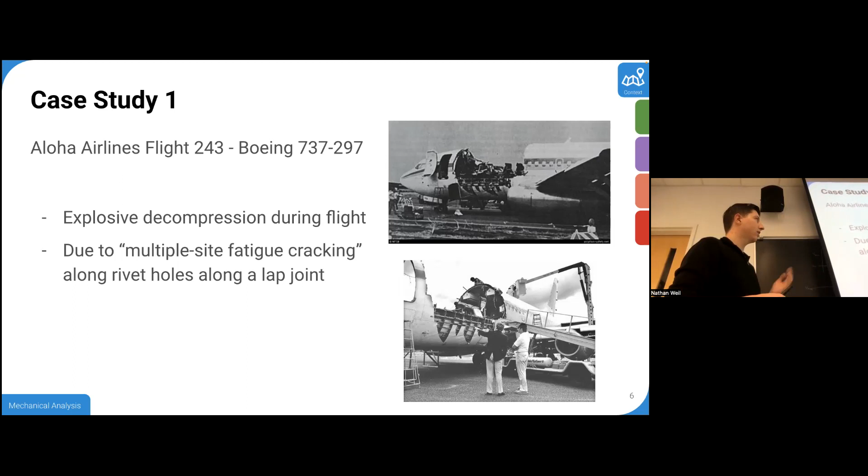A lap joint between two plates of metal—basically an airplane, right? It's a pressurized system, a pressurized tube. So every time it's pressurized and depressurized, it pulls tension and then releases that tension, repeatedly. That repeated loading caused fatigue cracking to occur along those lap joints in the metal. So what happened was that panel got overpressurized, and eventually, even though it should never have broken at that limit—it's way below its yield strength when it was first manufactured—because this crack started forming, explosive decompression occurred. Very scary.

So what happened was the gusset plates were a little bit undersized, which means they were prone to fatigue much faster than they should have been, and the plates cracked, and then the beams weren't connected anymore, and thus the bridge collapsed. So yeah, fatigue is real, and it's scary, and it is kind of hard to predict, and it matters a ton for really big stuff.

That's the gist. But it also matters on small things. I'm pretty sure if you're here, you've probably done the paperclip bendy thing at some point. If somebody handed you a paperclip, how would you break it? You're not going to sit there like an instructor and just pop the thing—that'd be pretty entertaining, but I don't think I can do that.

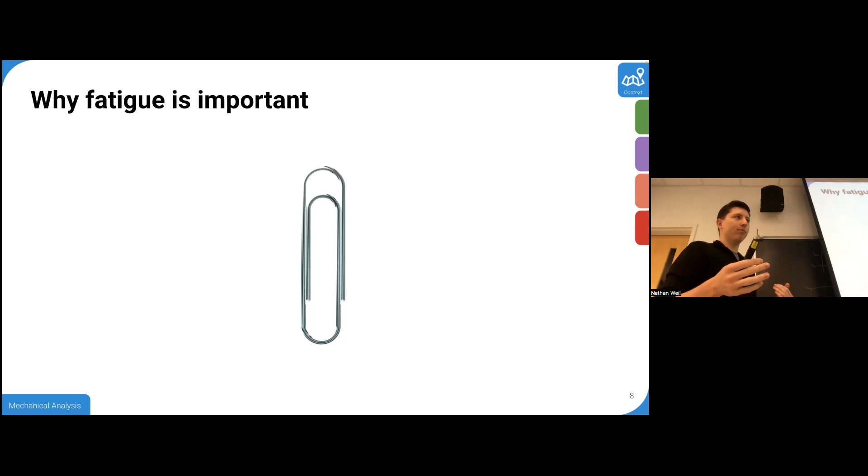An important thing about paperclips to note is that when you're bending them back and forth really quickly at a severe angle, you're not just passing the yield—you're going past the yield strength, right? Because if you bend it all the way over and let go, it'll stay in that position. So that means you're passing the yield strength in bending.

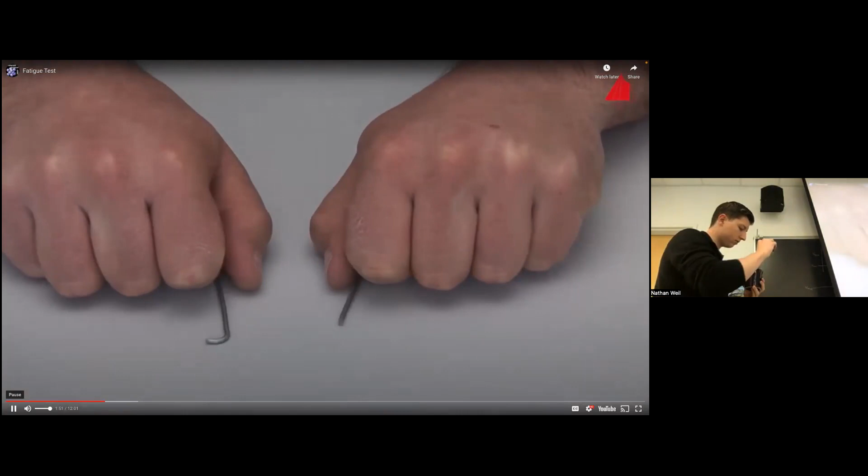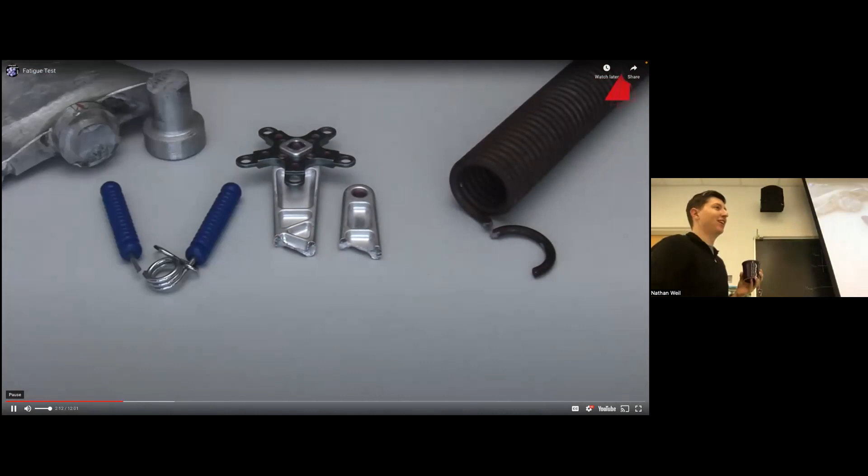This bicycle crank arm had only been able to endure the cyclic loading for a certain time before it broke. The fate of the garage door spring was the same - it had fractured. The broken exercise equipment, a torn compressor blade of a fan, a bandsaw blade full of cracks, the broken screw, a defective universal joint, and many other examples show how important this phenomenon is.

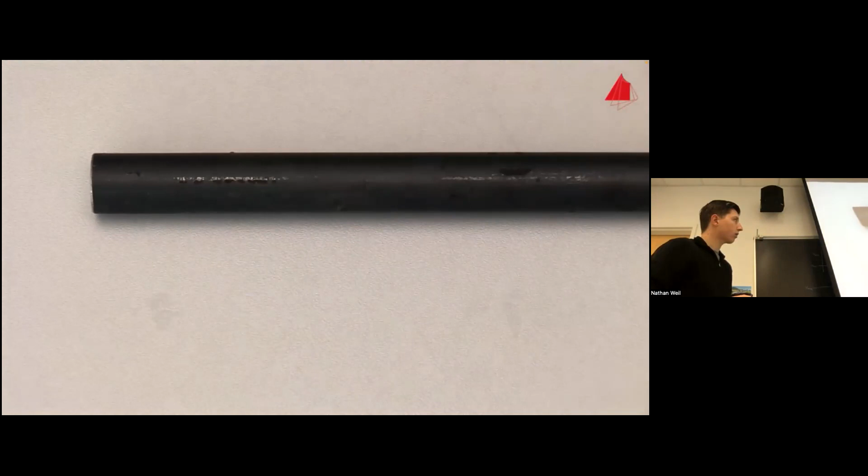Each day, thousands of items break due to cyclic, often repeated loading. How can we make sure that all these components withstand the cyclic loads? To achieve this, one has to test the materials appropriately. We intend to measure the fatigue strength of a frequently used steel in our laboratory. Hot-rolled steel rods made from the structural steel S235JR are used as base material. In order to eliminate the influence of the surface and to stress the material in a well-defined manner, suitable specimens have to be machined from the rods.

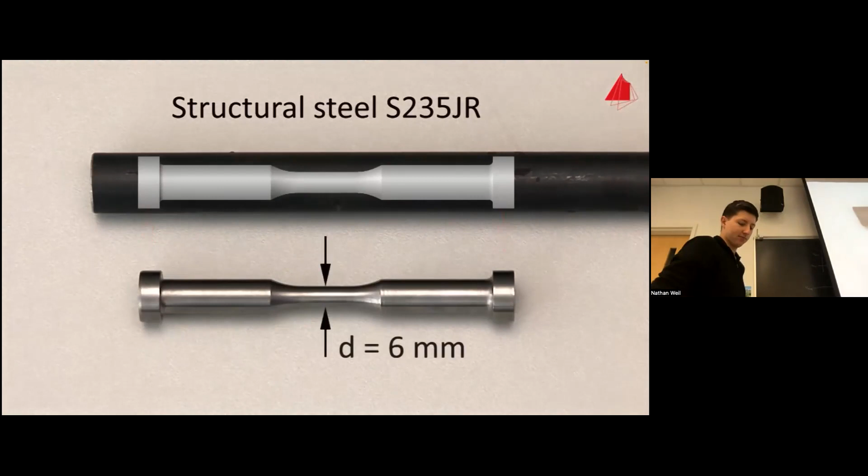This specimen type would be ideal. The shoulder-shaped ends have been designed for safe gripping. The actually tested region is cylindrical with a diameter of 6 millimeters - it's a revolved dog bone. The material tester goes to the workshop to get 10 specimens manufactured from the rods, not just one. All of the specimens are as identical as possible. Back in the lab, he has all specimens ready for use and picks out the first one.

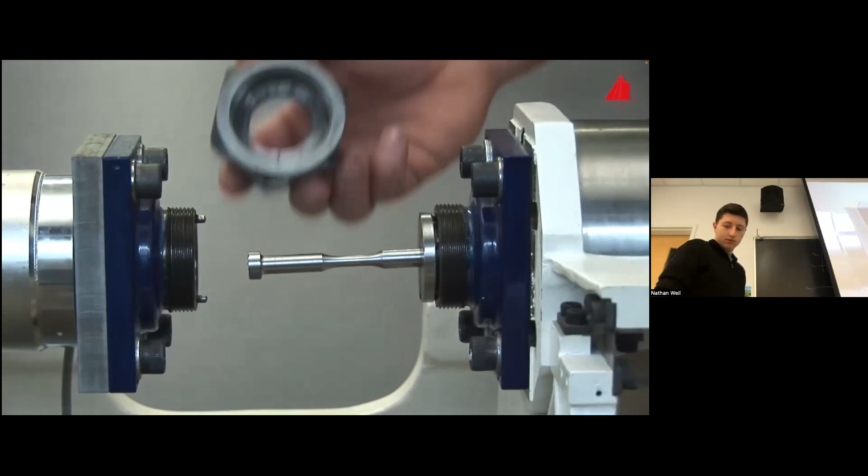He mounts the specimen carefully and securely into the fatigue testing machine. Together with two half shells, he inserts one end of the specimen into the right specimen grip. With a union nut, he locks the right end. Likewise, he mounts the left end into the left specimen grip and tightens the nuts.

The preparation is now complete. The material tester then selects the appropriate test parameters on the control computer. He intends to load the first specimen alternately with a tensile force of 7 kilonewtons and a compressive force of 7 kilonewtons. The mean force is 0.

A click on the start button and the testing machine begins to stress the specimen periodically.

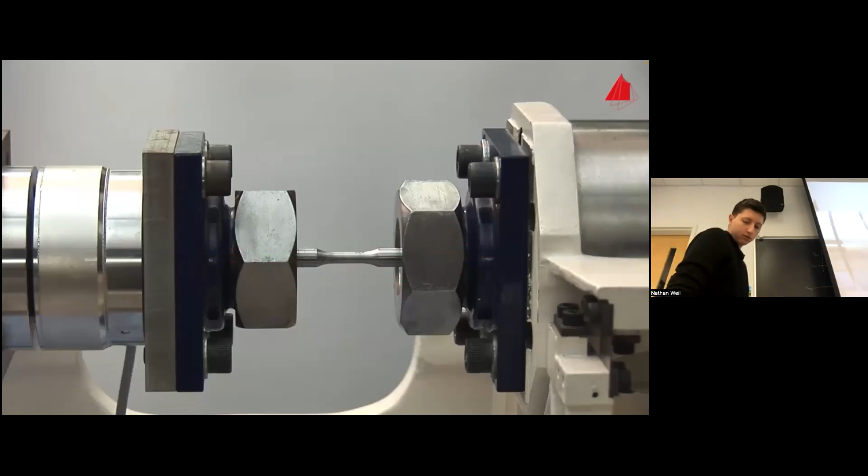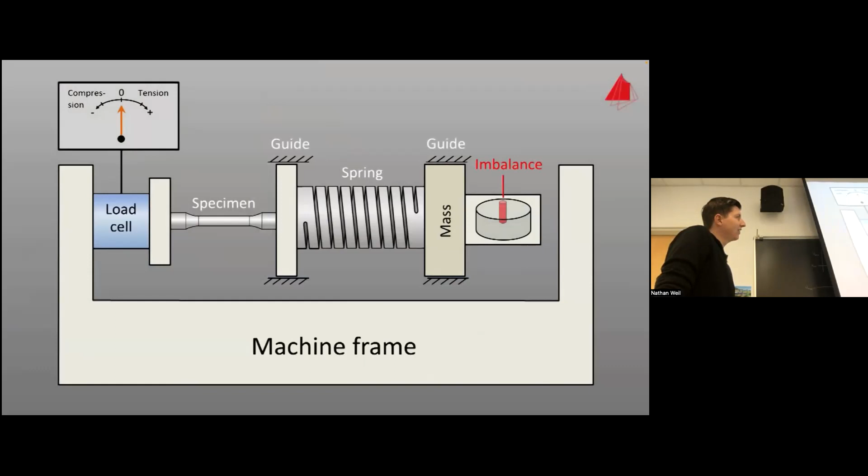Our fatigue testing machine is equipped with a mechanical resonance drive. The specimen is connected at its left grip via a load cell to the machine frame. At the right grip, a spring is mounted, and there in turn, a mass. An imbalance stimulates the mass to vibrate. Longitudinal guides prevent the mass from vibrating in the transverse direction. Via the spring, the test force acts on the specimen. By varying the excitation frequency of the imbalance, the test force can be controlled. In our case, the specimen is loaded with about 25 cycles per second.

Meanwhile, the first specimen has already endured over 300,000 load cycles and still seems to be intact.

That's fast, but it'll take a little while.

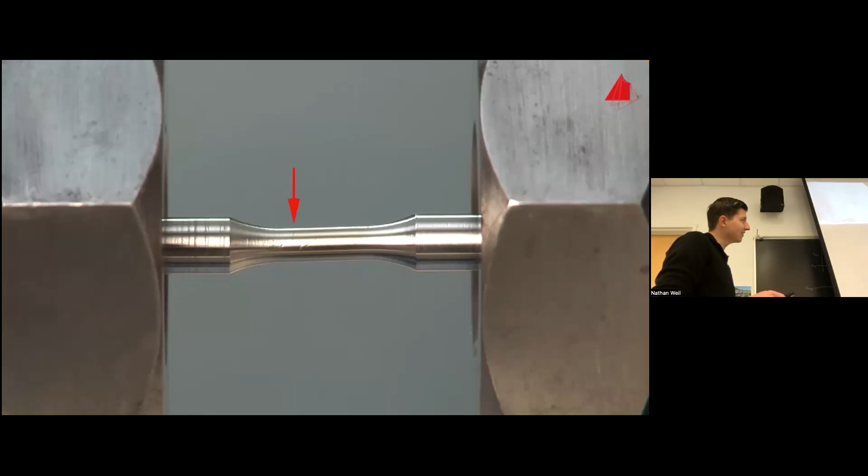In reality, however, several cracks have already developed on the surface, the so-called fatigue cracks. With each load cycle, they grow a bit further. The biggest crack gains the upper hand, grows the fastest, and finally leads to fracture after 381,000 load cycles.

The first test is finished. The material tester removes the fragments cautiously and inspects the fracture surfaces.

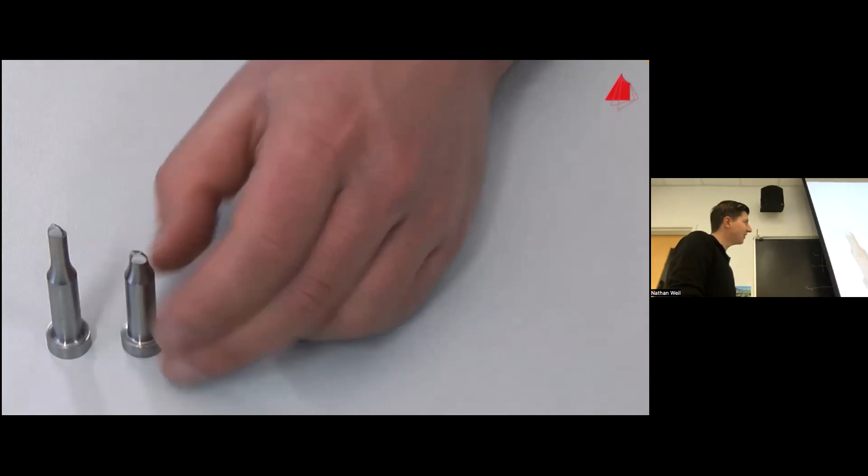At first glance, the fracture surface looks unimpressive. A closer look reveals two regions: the rather dull, predominantly flat fatigue crack propagation area, and the rough residual fracture area. The residual fracture area results from the final catastrophic rupture. The fatigue crack propagation area has developed during the cyclic growth of the fatigue cracks starting at the surface of the specimen.

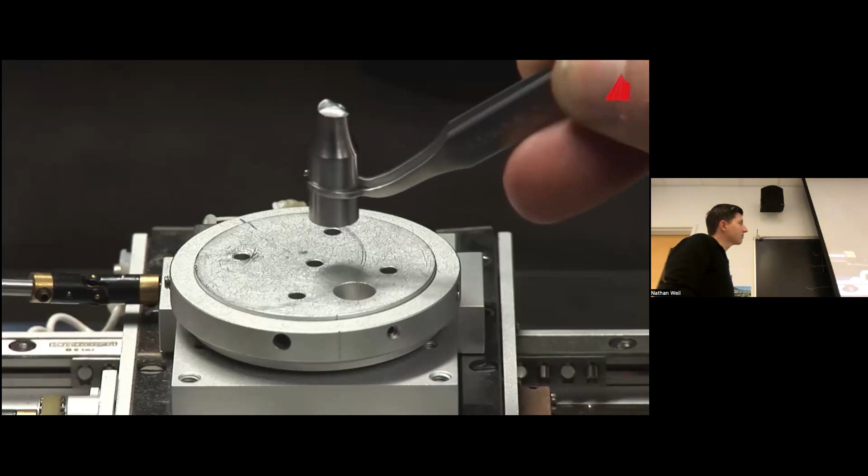What does the fatigue crack propagation area look like at higher magnification? One of the fragments is carefully placed on the specimen stage of our scanning electron microscope. Now we can investigate the fatigue crack propagation area in detail. In some places, but not everywhere, parallel grooves and ridges can be seen, the so-called fatigue striations. Each groove and each ridge has been formed by an individual load cycle, a typical phenomenon.

We want to know how many load cycles this material can endure with other loads. For this purpose, the material tester picks the next specimen from his supply and installs it into the fatigue testing machine.

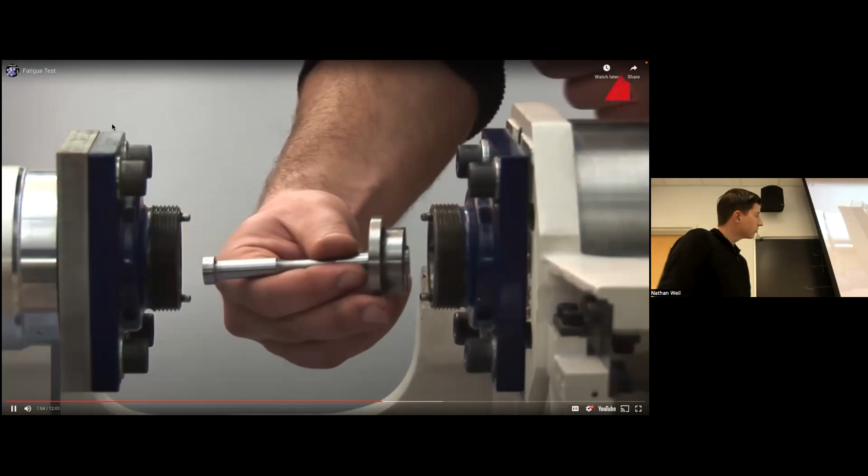The problem with materials is that... there we go. They should really fix that. I don't know why it does that every single time. All right.

Yeah, does that make sense to everybody? Kind of super cool. I love that, like magnetic, or the mechanical resonance drive. It sounds like super sci-fi, but it's pretty cool. It's a big spring. Anyway, also the kilonewtons, like lots of kilonewtons. That's like significant loading. That's kind of crazy.

Yeah, so fatigue life, there's a bunch of words that all are a little bit different depending on where you look, and they all mean the same thing though. So fatigue life, or this N number, N usually refers to number of cycles, and sometimes it's N sub F, some other things like that. It's just the number of cycles, and then S sub F is the fatigue strength, and that's in some stress unit, not strain, stress unit.

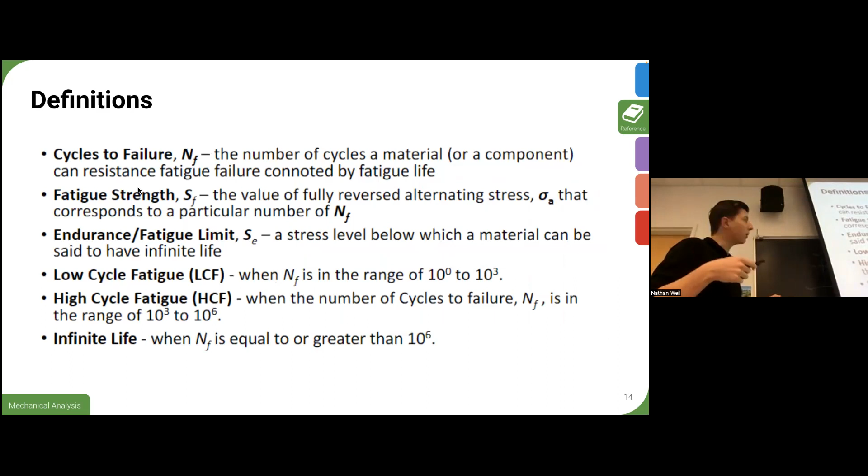Endurance fatigue limit - this is a stress level below which a material can be said to have infinite life. This is answering your question. We're going to answer it more specifically later. There's also low cycle fatigue, high cycle fatigue, and infinite life.

So I don't buy that. I don't think this is always true. I think it's often true for particular materials, but I don't think it's always true. It's also not true in every situation either.

Like helicopter parts, for example, they endure cyclic loading, hundreds or thousands of RPM. Engines too, hundreds of thousands of RPM for hundreds and thousands of hours. So that is a lot of cycles, and you could get past this number relatively quickly.

Basically, different industries and different load cases, different parts have different numbers of cycles they need to endure based on the loads they see. So infinite life can mean different things depending on different parts. But if it's more than this, it's probably not going to fail in the foreseeable future. But that's not good enough for helicopters or airplanes, of course. I'll talk about low and high cycle fatigue in a second here.

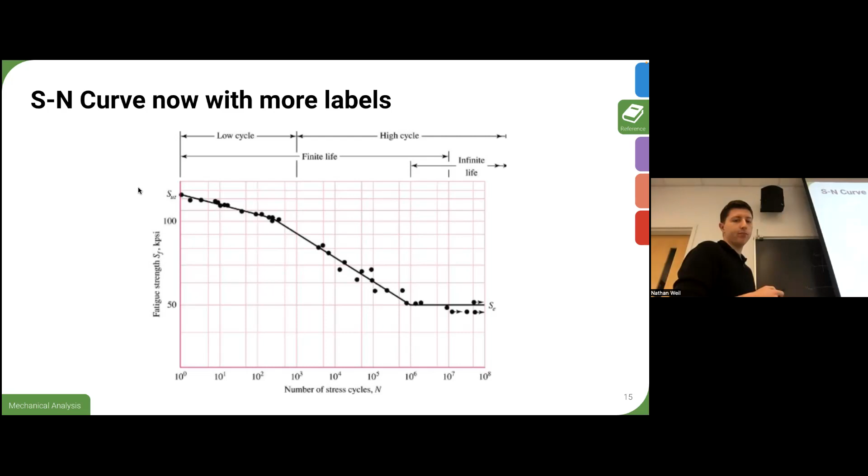Cool, okay, so here are the 3 big methods that are most used probably. Stress life is the big one - this is based on the stress levels only, and it's not accurate for low cycle fatigue when there's a lot of plastic deformation, but it is the most traditional method. It's the go-to, definitely the easiest to implement, and it can do it really quickly.

There's a lot of supporting data for it, for different materials and all that kind of stuff. And it represents high cycle stuff pretty well—anything that's more than a couple thousand cycles. So that's like this stuff over here: small oscillations causing cracks over long periods of time or long numbers of cycles.

There's also strain life, which is kind of a more detailed look at plastic deformation in localized areas. So that's kind of like this—for example, for the paperclip, you're causing plastic deformation at that point. That's good for lower stuff. There's also some uncertainties here because it really depends on the exact piece that you're testing. So again, it's a statistical approach with a large safety factor.

And then linear elastic fracture mechanics—this is advanced computer simulation stuff that you combine with testing. For example, this might be used on bridges where a couple of cracks have appeared. A lot of time engineers can use this to define a critical crack length, where as long as the crack is shorter than like 1/10 of an inch, it's fine. And if it goes beyond 1/10 of an inch, it has to be repaired or the part has to be replaced based off of these predictions.

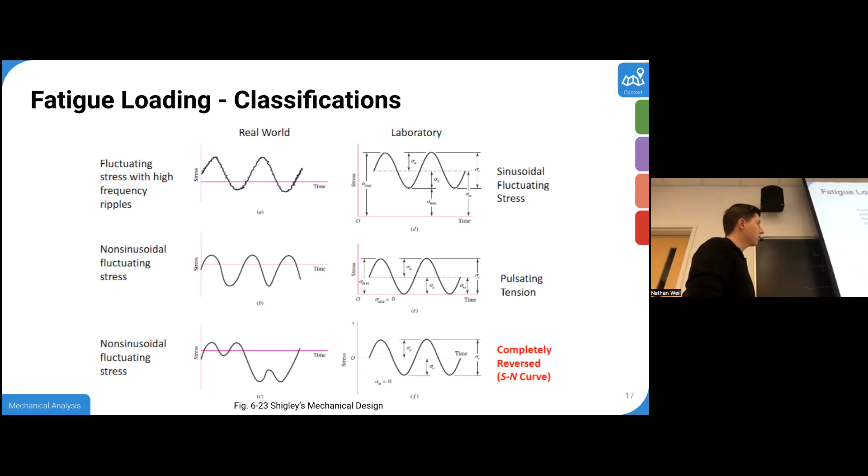So just be aware that stuff is tested like this, and then the real world treats it like this. That's another reason you have to add even more buffer, because there's no guarantee this could be better or worse depending on what the actual amplitude is and what all the patterns are. So, definitely less predictable—more issues, lovely.

Okay, so here's some cool symptoms of metal fatigue, looking at the different parts. Stage 1 is initiation of the micro crack due to cyclic plastic deformation. That can also be really tiny local yielding—it doesn't have to be macro yielding of the part, or dramatic change in strain. It can happen at a local level, but for plastic deformation this is true.

And then it progresses to a macro crack, and it opens and closes, and that's what causes those striations. Every time the part's loaded, it opens up, tears a little bit more, then it's compressed again and tears a little bit more, and that oscillation is what causes these stripes. So you can see the crack initially started there, and then it kind of got pulled and pulled and pulled.

And then this area down here is where the remaining material is insufficient to carry the load, and it fails by simple ultimate failure—so it pops. This is also in Shigley's.

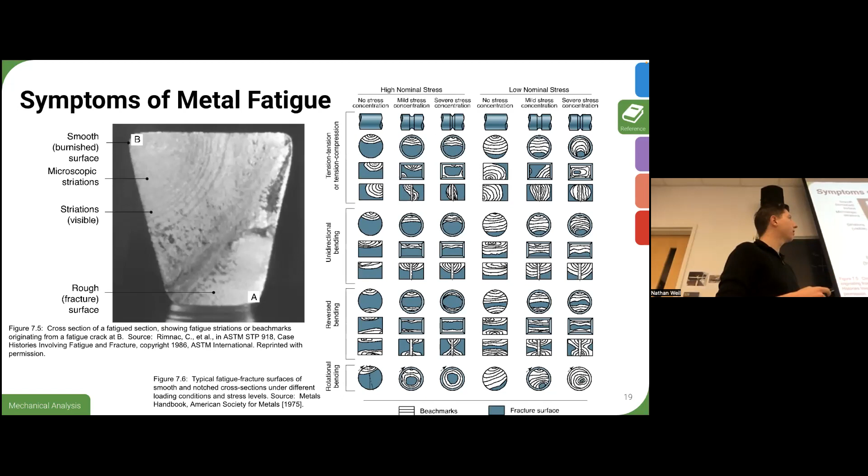This is a cool graph, basically a way of looking at a part and telling what kind of failure happened to it, or where the fatigue was. So there's normal tension compression stuff, the kind of stuff we were looking at in that test video. That's just back and forth tension compression. There's also a unidirectional bending test.

I think there's a picture of what a test for that looks like later, but it's pure bending, not any tension or compression at all, or shear, just pure bending forces. There's also reverse bending. Actually, I do know the difference: unidirectional bending is just it gets bent and then goes back to neutral, bent and goes back to neutral. Reverse bending is it gets bent in both directions, if that makes sense.

So on the sine wave, that would mean it would go up and then flatten, up and then flatten, or it should be like a sine wave above the axis. But the average stress would be different. I think the line is the same. Yes, I see what you're saying. So the mean stress is here, and it may be above the zero stress line.

And then this is rotational bending, and there's a bunch of different things, again same kind of general thing. There are some questions about this in the homework, so be aware. Here's another example.

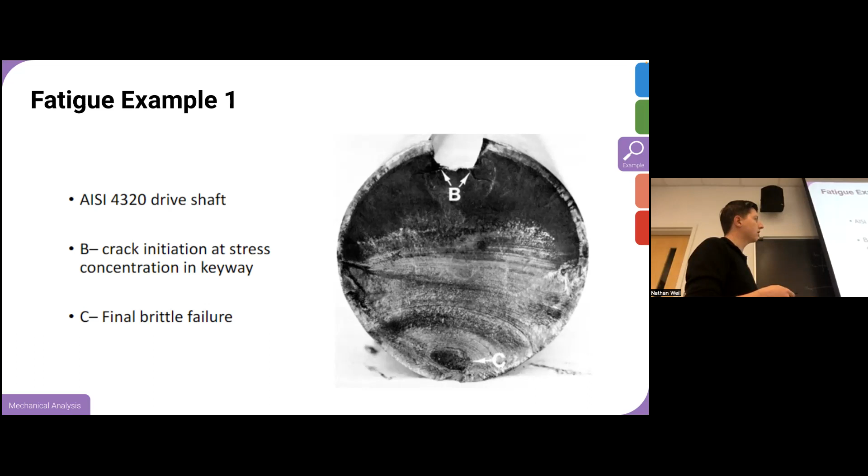Basically same thing - this is a drive shaft with a keyway. Generally, the reason fatigue starts is always at stress concentrations, whether it's a perfect surface with just a small imperfection on one side where the crack propagates from, or an actual stress concentration like a keyway. Failure and crack propagation often starts at existing stress concentrations in the part. So the failure starts here, it propagates, and then it fails pretty far down there.

Okay, another thing - I don't think I've actually seen a picture of the real wheel, this is from Shigley's also. But in this case, this wheel cracked at the stamping marks because it doesn't take a ton for cracks to form around sharp corners and stuff. So even though these corners are really, really tiny, it can still be enough to propagate a fracture. So it's pretty interesting, surface finish can play a role - a cast part versus a ground or polished part can have different fatigue lives based on the surface finish, an interesting thing to keep in mind.

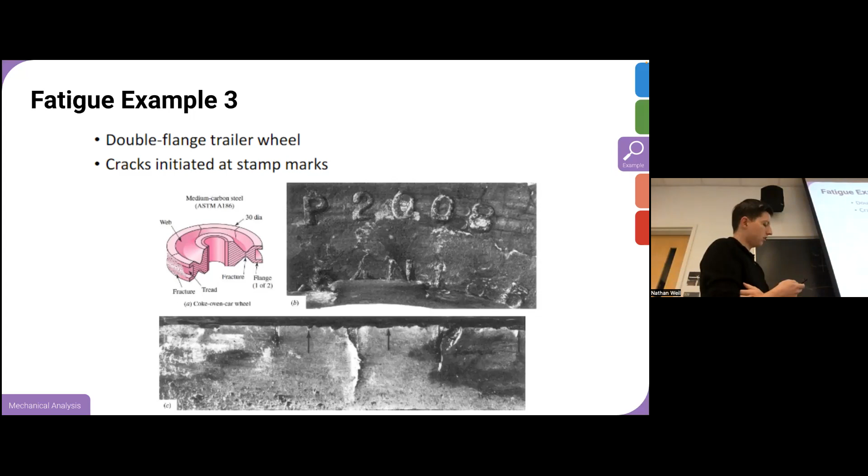So if you have a part under a lot of fatigue, cyclic stress over and over again, if you add like 20% more material to it, roughly it'll last like 9 times longer in that situation. Again, this is very rough and those numbers don't actually mean anything - you've got to actually do the analysis, but small changes in consistent amplitude of the stress matter a lot. Likewise, if you add a little material, it'll last a lot longer.

Okay, so now we're going to look at determining fatigue life. Woohoo!

So like I said before, there are three ways: stress life, strain life, and fracture mechanics, which we're not going to really cover. We're going to look at a slide and it'll be like, ooh, that's cool, and we're going to move on. Again, look at Shigley's or talk to John Stoke or look into it yourself on ANSYS tutorials or whatever.

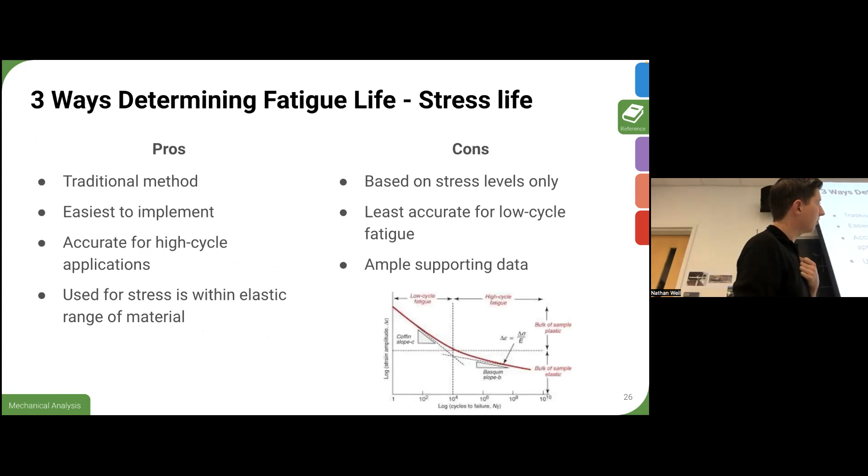So like I said before, stress life is traditional, easy, high cycle, within elastic deformation, no plastic deformation. It's based on stress levels only. It's not accurate for low cycle, and there's a lot of supporting data. I don't know why that's a con. Anyway, this is important, we'll get to that in a minute.

Basically, like I said before, it predicts crack growth. So this is for if you inspect a structure with an X-ray detection sensor or any kind of sensor that detects cracks, you can detect crack formation, and then you can build a computer model based off of that and predict when it's going to fail and how that crack can propagate. The whole point is cracks cause even more dramatic stress concentrations. So if you have a giant crack, it's not just the strength of the material that's left behind, it's also how that crack continues moving through the lattice structure. So that's what this is all built around.

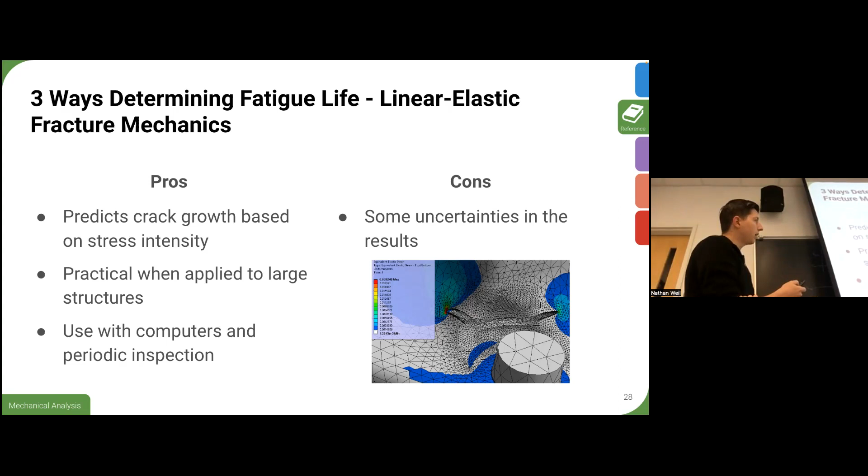Okay, so testing. We saw one example, and that was axial fatigue. So it's basically like if you had the instruments just go up and down for a really long time, which the instruments can't actually do because they don't do compression with the normal jaws and stuff like that, and it would also take forever. So having the oscillating mass means you can crank out those tests way, way faster.

There's also high temperature testing. There's rotating beam testing, which I'll show a picture of in a minute, and there's also shear fatigue. So basically, shear can happen in pretty much any direction. Any stress can cause fatigue over time.

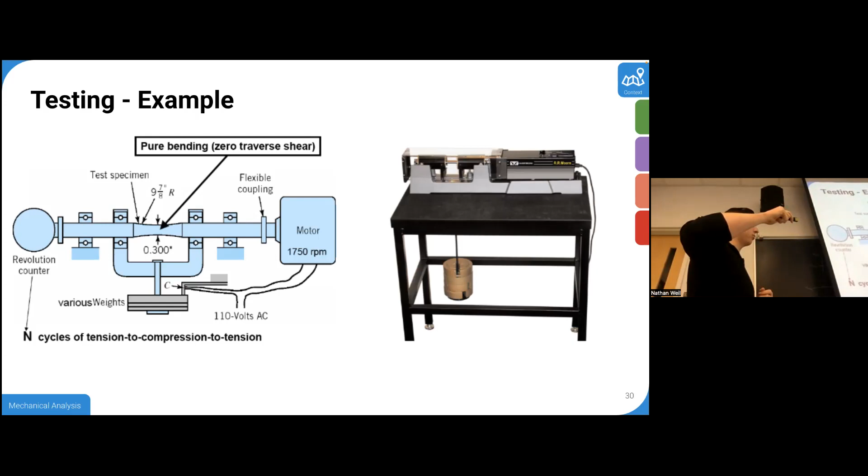So here's the rotating test example. Instead of the other one, which is a front and back motion, this has a counterweight over here, and there's a motor, and the whole thing bends. The idea is to have no axial loading and no shear, but just pure bending of that part, and then you're rolling it over. So if you look at one spot on the test sample as it travels in a circle, it has tension on the top and compression on the bottom, and it alternates between that in a sine pattern, right? This is another way of getting at a similar thing, but it's a different load case.

So depending on if you're looking at a drive shaft in fatigue or some kind of link or something like that, you can have different types of fatigue. So this is a way of testing that. Anybody have any questions also?

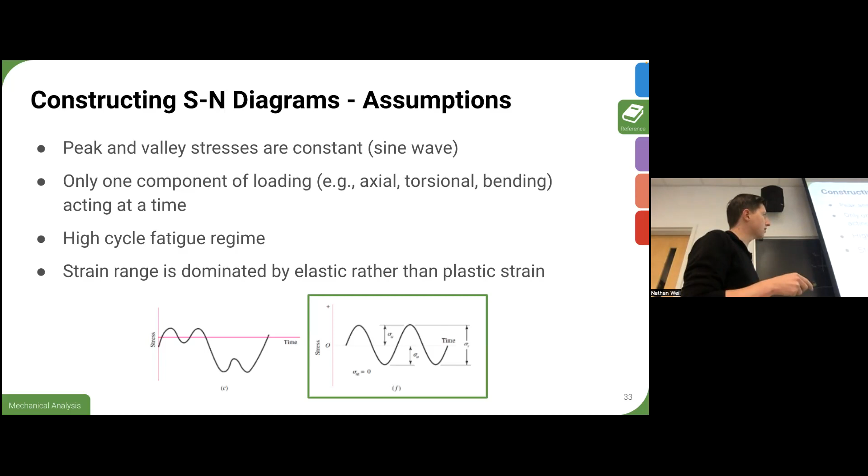Okay, so we're going to talk about this more at the end, but the short answer for what things can last forever is: steel, and most ferrous materials can last forever. There's probably some exceptions to that. Pretty much everything else will fail due to fatigue someday, even if it's at like 10 to the 15 cycles, if the strain is like barely moving it at all. But anything that's not steel or ferrous will fail at some point.

And then for aluminum, copper, pretty much everything else that's not steel, it will eventually fail. But generally, again, this used to be 10 to the 6, now it's 10 to the 8. Basically, depending on the industry, the part, and the loading situation, it will change that value, and you will have different functional infinite life limits.

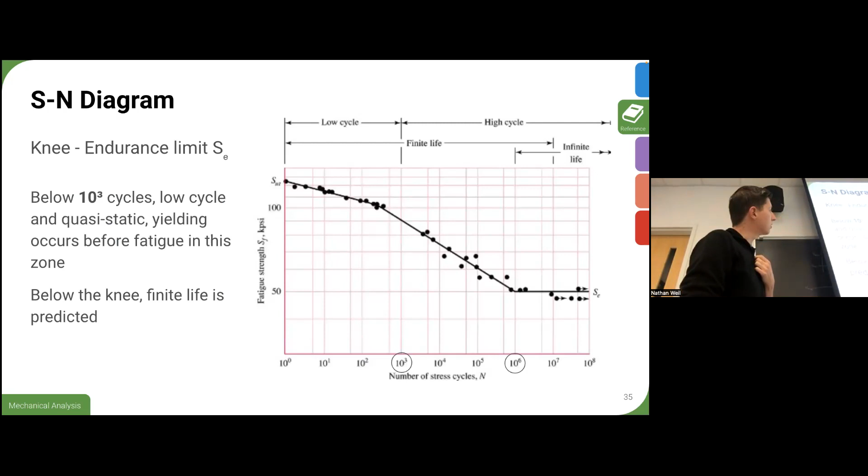We've covered this, I think. Basically, just be very aware of what's high cycle and where this flattens out. This is often called the knee.

Steel is usually flatline about here, and as long as you stay below this strain in your oscillating loads, it will theoretically never fail. So if things have to last forever, don't make them out of anything but steel, basically. But forever can mean different things, as we talked about.

Also a really important thing, we'll talk about this again later, but non-corrosive conditions, temperature, and other things like that do matter. So if you put a piece of steel in an acid bath or salt water or whatever, it may not have the same property, because contaminants outside, or things that affect the strength of it, can crack and creep into the cracks and help exacerbate fatigue sooner. So this is true in a laboratory or really clean environment, not necessarily true in the real world. So that's another issue there.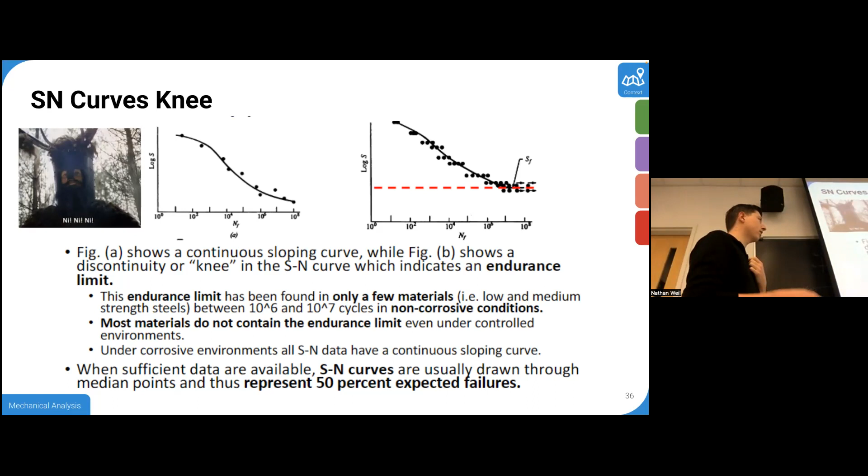And like I said, it's the median point, so it's 50% of expected failures, which means your part might fail earlier. Okay, I think we talked about this already, but with a paperclip, when you're bending it back and forth, you're in plastic deformation, so it's low cycle fatigue. You could do a paperclip experiment with high cycle fatigue, but it would take a long time because you'd have to flick it and never plastically deform it, so it would take forever.

Okay, stress life. Also, we can take a break if people want to. We've been here for a little while, if people want to get up and stretch your legs a little bit.

These slides are mostly for reference, so we'll go through them quickly. This is only applicable for completely reverse stresses—though I'm not sure that's always true. I think there are ways you can use it for non-reverse stresses, non-fully reciprocating ones, but there are some caveats to that.

Calculating fatigue strength—there's a lot of words here, so we're not going to go through the whole thing; come back and look at it later if you want. The SN curve basically shows one way of comparing your part, or looking at its fatigue, by finding where you want to be on this plot. You look at the amplitude of your stress from your load case, go over until you find that point, then look down at the number of cycles. This equation functionally shows you where your part is in relation to what has been tested previously, if that makes sense.

So the first way you can check is if you have a published SN curve you can reference for your analysis—sometimes you can't reference SN curves for various reasons, but in this case you just go over, go down, find your point, and that gives you a number. I'm not sure we ever settled on what eta actually is in this case—it's either a safety factor or something. We don't fully understand this.

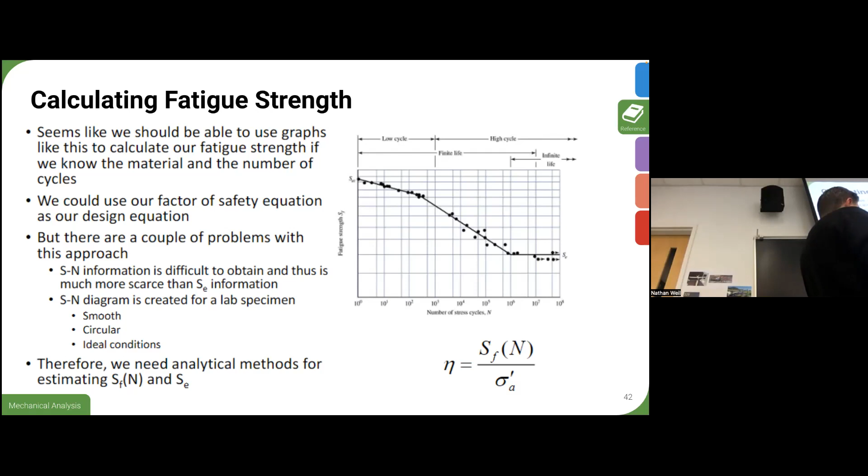Quick check, I might be telling you something totally wrong. Oh, right. Endurance limit is the... oh my gosh, right, okay, sorry, my bad.

Endurance limit is the point at which steels no longer have any further degradation - it's the infinite life point. So this is the strength of the material at 10 bajillion gazillion cycles. Yeah, so erase what I was saying about them being the same - it's not the same thing. It's the equivalent strength at infinite cycles, basically.

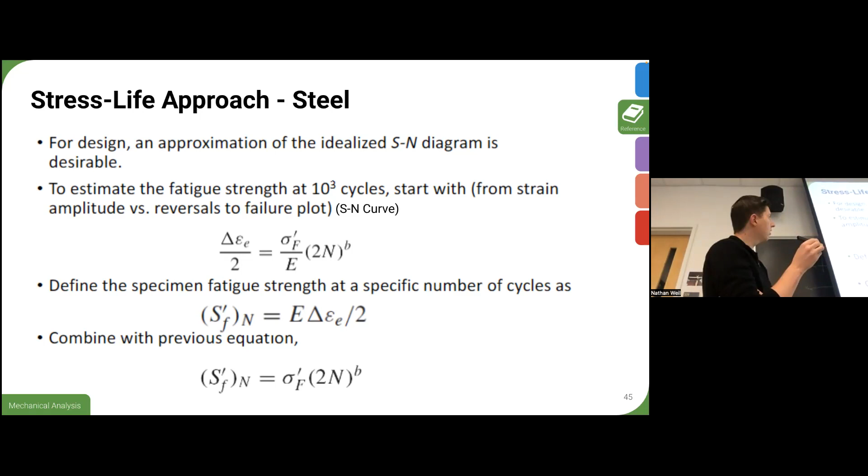So for example, to fill this out, basically 10 to the 3 cycles - you just plug that into the previous equation. And F here, this weird swooshy F, is the fraction of ultimate strength represented by fatigue strength - it's basically your knockdown value. So if your ultimate strength is 200, like you were saying before, and F is 0.5, your fracture strength or fatigue strength will be at 100. So this is a value from 0 to 1 that determines how much of the ultimate strength your current strength is at that number of cycles.

Feel free to come dig through these slides later and come to office hours and we can talk about it more. This is how you can find that B constant down there. You're basically just substituting all these equations in to find this value.

So this is a plot of that value F compared to the ultimate strength, ultimate tensile strength of different materials. This is the general trajectory. So it's fatigue strength fraction versus the ultimate tensile strength. And this is assuming that thing we assumed earlier of that 1/2 value at 10 to the 6 cycles. So this is at 10 to the 3rd cycles.

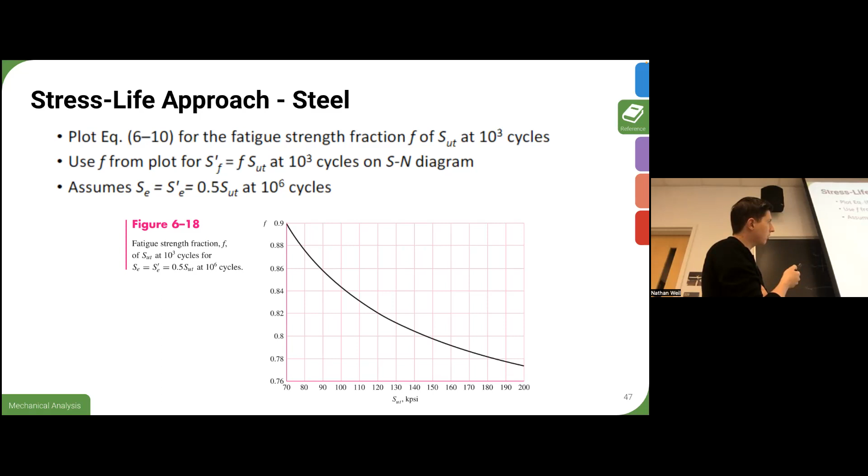Wait. I'm confused again. Right, okay, yeah. Okay, so I'm not sure this is on homework or not. I actually think it is.

Basically, you can write an equation for an SN line. This one in particular, so not the low cycle and not the infinite life, but the one in between, which is the one you care about most of the time. If you're fatigue limited and you're not in this bottom regime down here where you have infinite life, if you're in this middle regime, which is the most common one you're in for failure, you need at least 2 known points, and basically you're just making a line of best fit there.

And because it's not linear actually, because of course it's a logarithmic scale, right? So even though it looks linear, it's not actually linear. It's actually like a really large dramatic swoosh. So hence this equation being not y equal to mx plus b. Yeah, it's a log function basically.

And so you can use these equations for your line. So this is your function here, and these basically give you an a and a b value, and then that'll give you a closed form solution. Well, it'll give you a way to estimate the slope of this line, so you can look at any other point and value it.

You never actually want to do this for 2 known points. You never want to just test 2 samples and put a line through it, because one sample might be like here, and the other one's like here, and you have a really warped perspective of what that line looks like. So you always want to do a lot of averages, use a lot of points to define this. But this is a really fast way if you just have 2 data points to look at it.

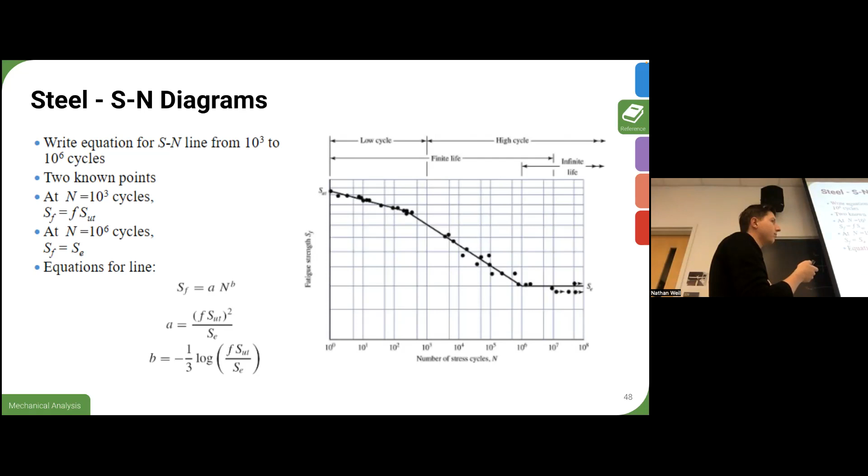Any questions? I know this is kind of a little bit unsatisfactory. Fatigue is wild, hard to predict. Cool. All right.

This is just another form of that previous equation, I believe. So yeah, this is what you can use that for. So if you find these values, this output is like another version of that, right? That gives you the same thing. So this will give you a number of cycles given a particular reversing stress.

So this is the amplitude of that sine wave. Remember, the amplitude is only the height of one side of it. It's not the height of both sides. And this is for completely reverse stress, like we said before.

And so that basically what we just saw is a derivation of the Basquin equation. So this is big. This is on the homework. Know this. It was originally published in 1910 too, which is kind of wild.

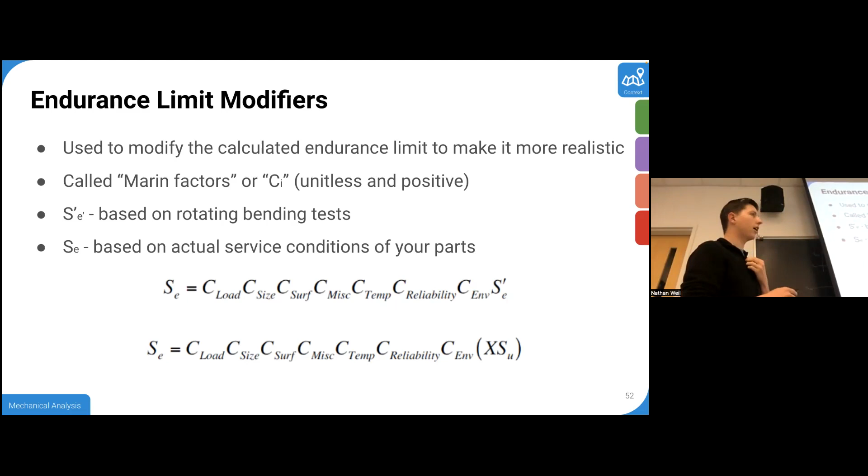So I know we've been talking about things, basically saying that it's really hard to talk about fatigue in the context of Olin, because usually we're not making things that are used maybe more than once, or maybe not used at all. So I'm trying to hopefully ground the conversation a little bit and give an example of a fatigue failure that we had in Formula. It was kind of obvious when you look at it in retrospect, and hopefully you'll share that obvious nature as I go through it. But just to give context of the system that I'm talking about.

So in this example, we were focusing on the anti-roll bar. The anti-roll bar is the system that goes between my two suspension systems and acts as a torsion spring that I'm bending and twisting as I move my suspension system. So normally when I don't have an anti-roll bar, or sometimes called a sway bar, or there's a bunch of other terms in the automotive industry, I have independent movement of my suspension system, and that generally leads to one wheel taking a huge amount of the load, and the other tire on the inside not being loaded as heavily.

Conversely, when I have an anti-roll bar, I'm sharing that load, using that spring to share it in between. And on your car, you have usually a tunable anti-roll bar, so I can change how much load is being shared and make it adjust to what I need.

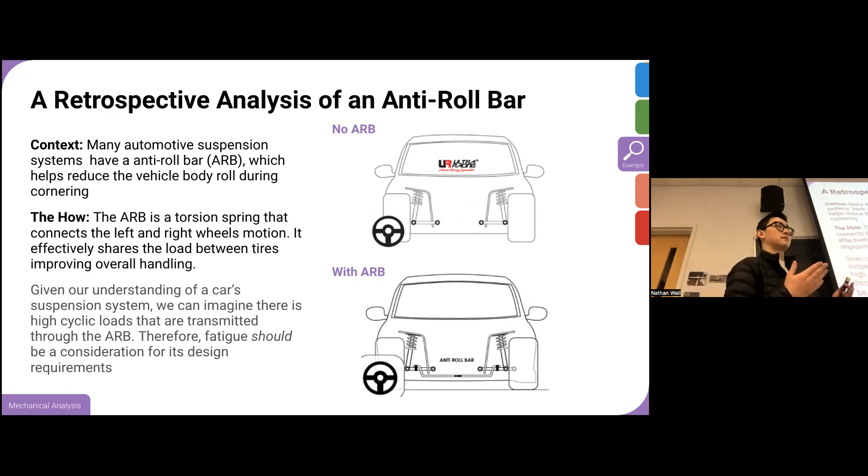So you would think fatigue and cyclic loading is something I should consider and should really be part of my design, and it really wasn't. For context, the system we designed basically had this moment arm - this is a cross-section view right now. I'll show a view of it in CAD later on that'll help explain things.

And as we know from looking at the previous slides, aluminum is really not that great when it comes to actual fatigue loading. It was great for getting the right spring constant for what we needed for the design, but my abstracted idealized system is not true to reality and it's not useful if it breaks. Contextually, we were very lucky that it failed while the person was not going fast or in a straight direction, and could have crashed.

This was a pretty catastrophic failure where basically this broke on our suspension system, and by doing so, shock loaded our shock and sheared our push rod, which in simple terms means our wheel was defunct and we just started skidding across the ground. So very lucky again, and it really could have been avoided if we had thought about things.

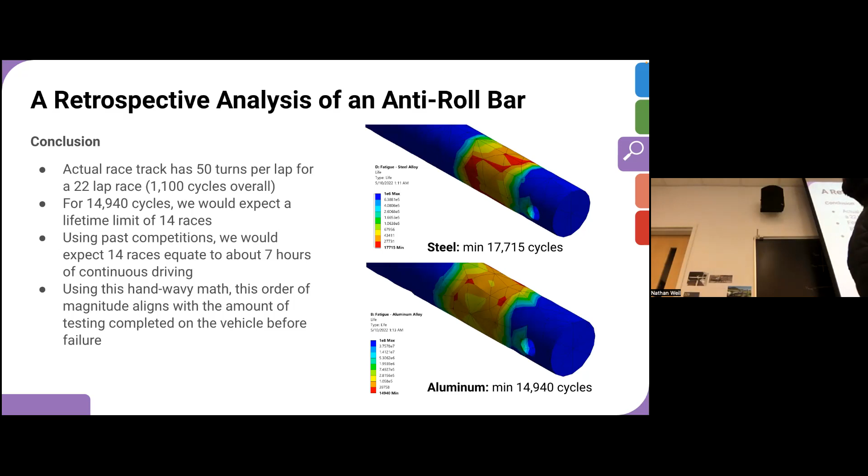But the long and short of it is that I really need to think about design when it comes to things beyond my static analysis. Sure, this part is not going to fail for max torque as I'm bending it once, but that's not the conditions that are realistic to what I'm actually doing. I need to think about connecting this abstraction of my system to something that makes sense for the manufacturing of it, that makes sense for how I'm actually welding this piece, and making sure I'm not assuming a purely bonded connection in my FEA analysis, which is not accurate if I have poor penetration on my weld.

Obviously, again, we got lucky that no one got seriously hurt, but this could have really caused someone to crash into a wall or get seriously injured. So these do have actual implications to your own designs. You may find this is really important for a future scope or ADE project, or other classes, so just keep it in mind. This is definitely considered in industry, but still can affect you even in the context of Olin.

And then another example that I thought of, that Nathan was mentioning, is this idea of crack propagation. You'll see, especially in casted materials, that is a huge thing. When I was working at Haas, one of the big things they avoided like the plague is the idea of microporosity in casted materials - tiny bubbles inside casted materials that allow cracks to propagate from the inside out, and it will fail in a way where you can't even see it happening because it's not failing from the outside. That can deal with a giant, thousands of pounds piece of casted steel basically cracking, and maybe my entire machine tool comes in half or something crazy like that.

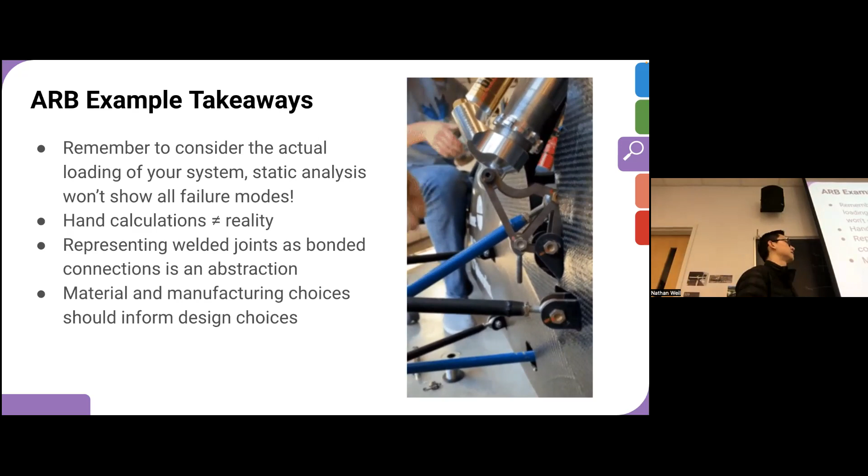And I could see that on a machine tool, this spinning thing that is kind of vibrating my machine constantly, that fatigue would really matter, and that I probably should think about how many cycles, given that it's spinning at tens of thousands of RPM, and I'm using it constantly day in, day out.

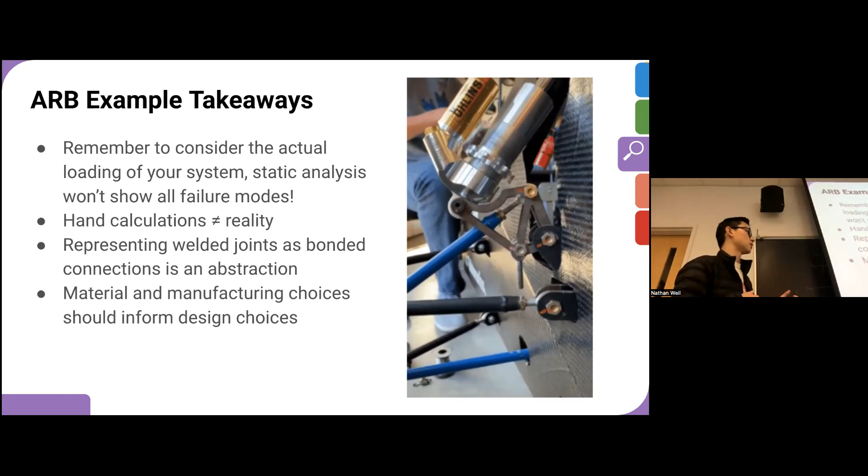But yeah, if you guys have other questions about how to use the really simple ANSYS or SolidWorks fatigue models, let me know. I have limited experience with it, but they are out there, and you do have some options when it comes to doing analysis.

All right, we are about there. Thank you, Colin. Yeah, it's really cool actually.

One quick touch on non-ferrous metals. Again, a lot of things, a lot of words - come back and look at it later if you want.

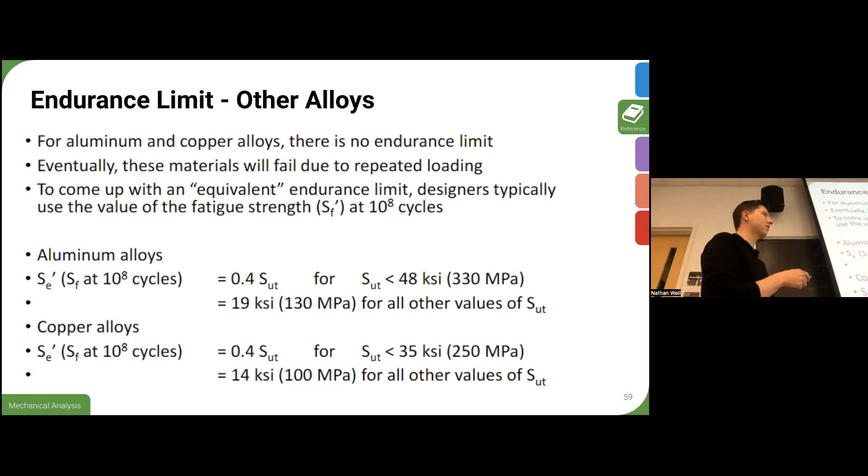Generally for aluminum alloys and copper alloys and things like that, 10 to the 8 cycles is like - if 10 to the 6 is fine for cars, 10 to the 8 is two orders of magnitude more than that. So this is only for things that are super high vibration or super aggressive, would pass 10 to the 8. Generally this can be assumed to be pretty much the limit. So this is just some more examples of that.

So this is an example of different types of material. For example, I don't know if there's anything but wrought iron - I've never heard of anything referred to as wrought except iron, but this seems to have a bit of a limit. So wrought iron would be here, and then permanent mold cast, like die cast, could be here, and sand cast could be lower.

So this is again looking at surface conditions, and the method of manufacturing can have a big effect, like Colin was just saying, with porosity and things like that. Sand cast obviously is going to be the roughest surface finish - it's going to have a lot of pores, so it can easily cause stress concentrations and cracks to form. Permanent mold cast is going to be smoother, and then wrought or polished or anything is going to be higher than that. So this is an example of that in the knockdown chart.

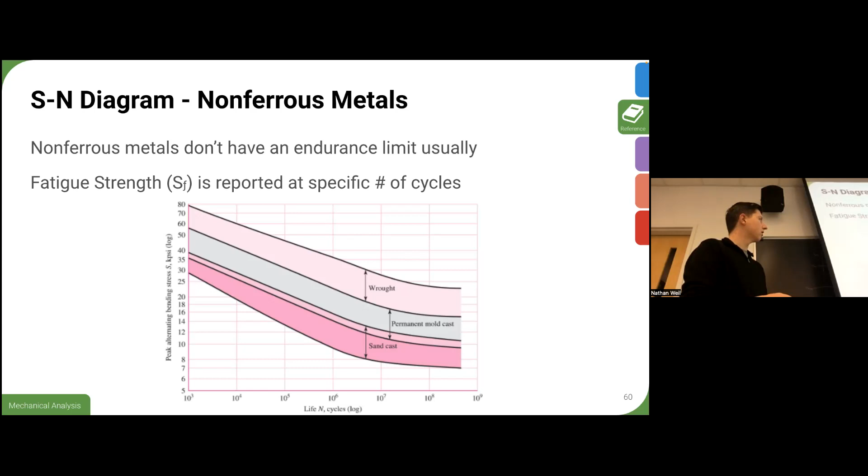So aluminum's not as good for fatigue. Basically steel is the best for fatigue, pretty much period. Other things can be totally fine - airplanes and helicopters are made almost entirely out of aluminum, so if you design your parts correctly and take this into account and do correct analysis, it's totally fine to use aluminum. But if you need something to last for, let's say, running in a hole in the ground pumping oil for 10,000 years or whatever, steel is probably going to be the right choice, generally speaking.

Okay, to close out, a thought question for you guys to think about.

Fatigue with other materials, composites, plastics. How might composites be different than normal isotropic materials in terms of fatigue? Any thoughts?

I feel like the resin might fail before the fibers. Interesting, yeah.

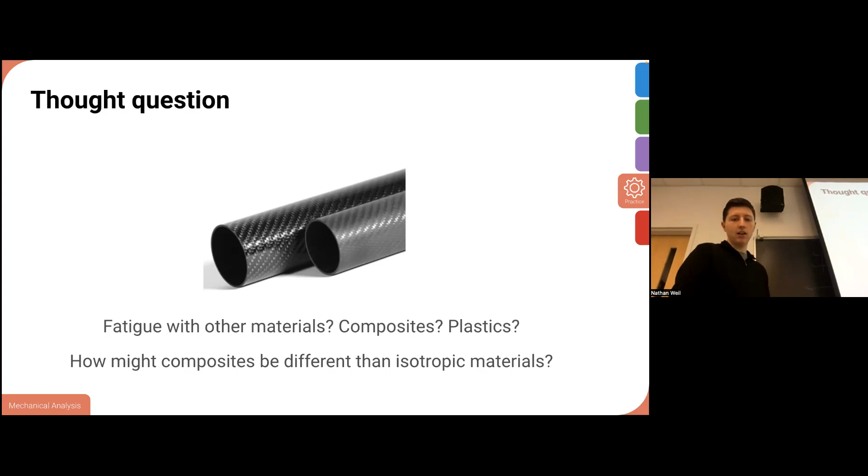As always, we have a bunch of other resources that are handy if you want to learn more about this.

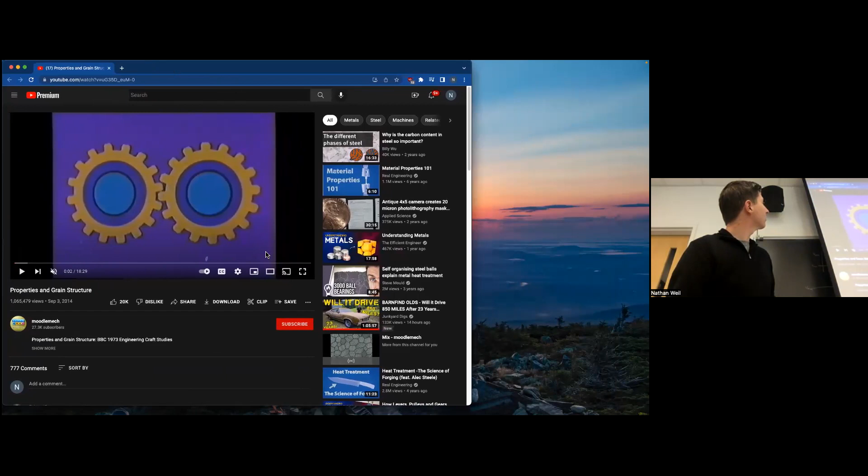This is also linked in one of the videos that was linked. Okay, boop. Oh, I gotta unmute it. Whoa, in like 80s TV stuff. Hold on, whoa. It's gonna be really loud or really quiet. There we go.

The safety barriers around this junction are coated with a thin layer of zinc. If we look closely at the surface of the zinc, we see it's built up of many different patches. You can find this effect on a number of zinc-coated objects. The patches you see are crystals or grains of zinc.

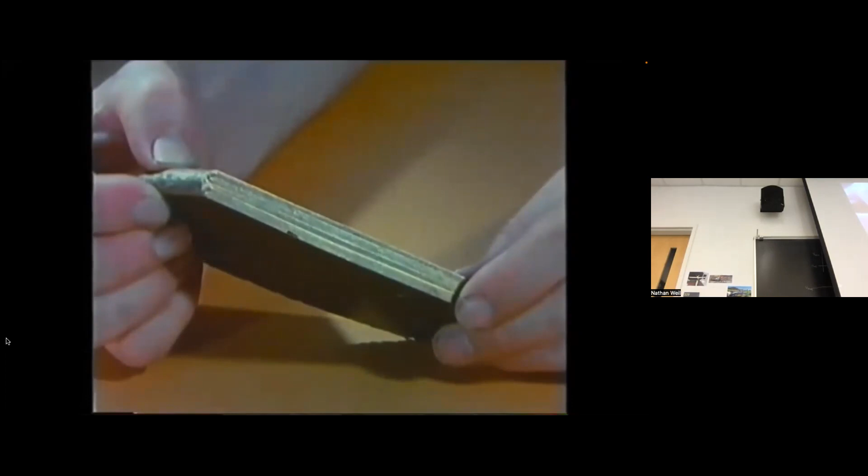Here's a piece of a different metal. It's been machined along one edge. You can't see any grains in this surface. However, if we turn it over, it's quite a different story. This piece of metal has been broken in half. Along the broken edge, you can see some of the grains from which this material is made. All metals are made up of grains, although you'll rarely see them like this. In fact, with most metals, including this piece of aluminium, the grains aren't visible, not even on the surface.

Here's a way of making them visible. First, we must give the aluminium a mirror-like finish. You can do this in MatSci. And there we are. Next, we treat the carefully prepared surface with a very powerful acid. Gloves are essential for this operation.

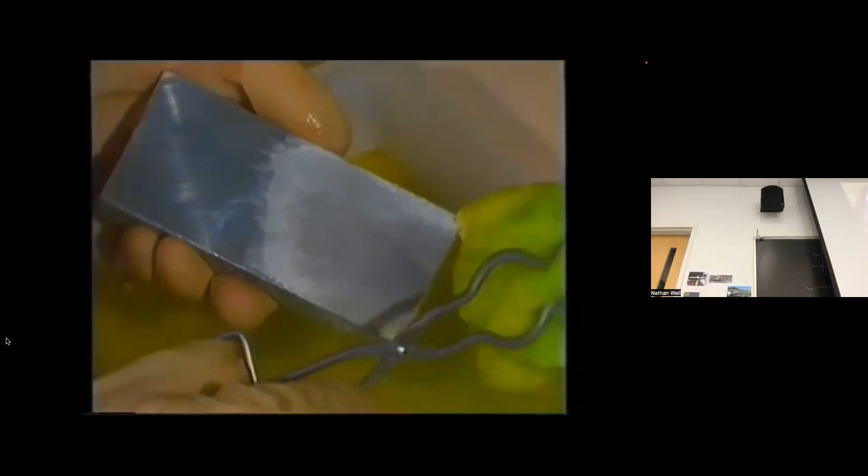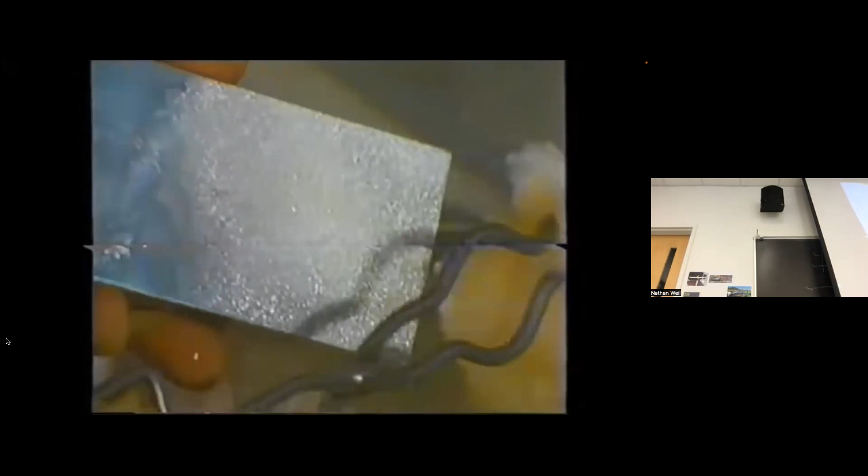As soon as the acids have time to react, the metal must be washed. It's then given a second treatment with another special chemical. We call this process etching. The particular chemicals used depend on the metal we're trying to etch.

One final wash, and there are the grains. Grains of pure aluminium. They're all similar, both in size and in structure. They appear as different shades only because of the way they reflect the light.

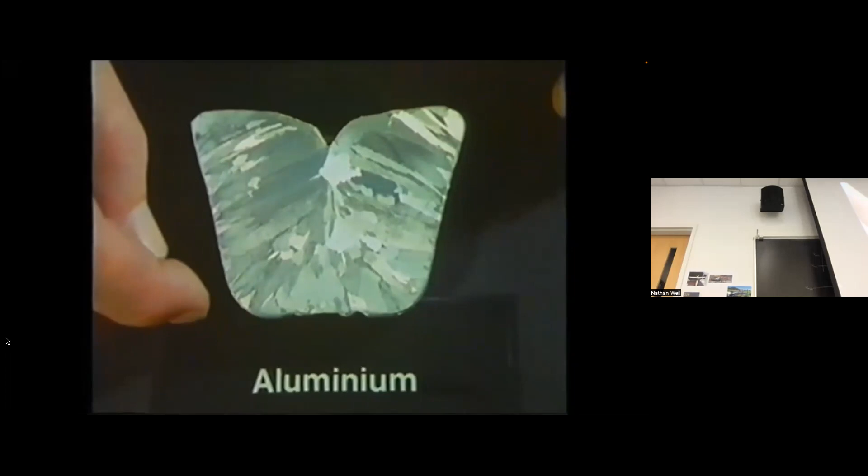By etching, we can reveal the grain structure of any metal. Here's a different sample of aluminium. In this case, the grains are much larger and they vary in size. And here's a piece of copper. In this sample, the grains seem to get smaller as you get nearer the middle. Zinc, a sample whose grains are all shapes and sizes.

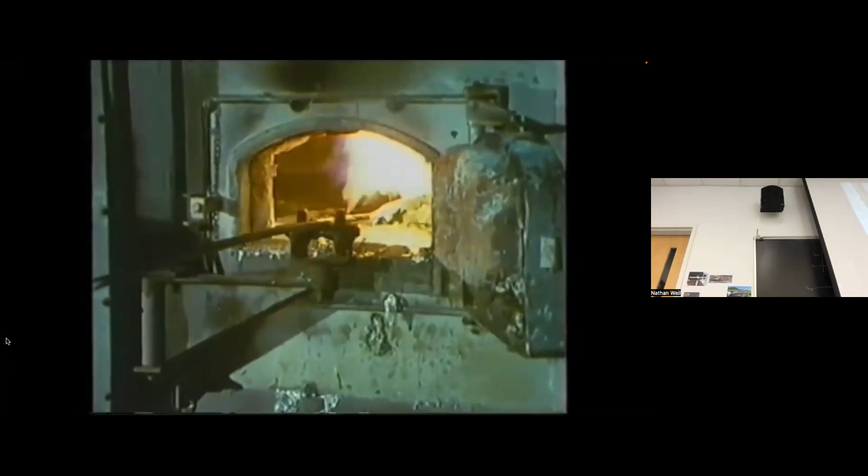But how do grains form? To find out, we've gone back to the stage when a metal is molten. In this furnace, the metal is aluminium. When the time is right, the furnace is tapped. The molten metal runs out into molds to form huge slabs of aluminium.

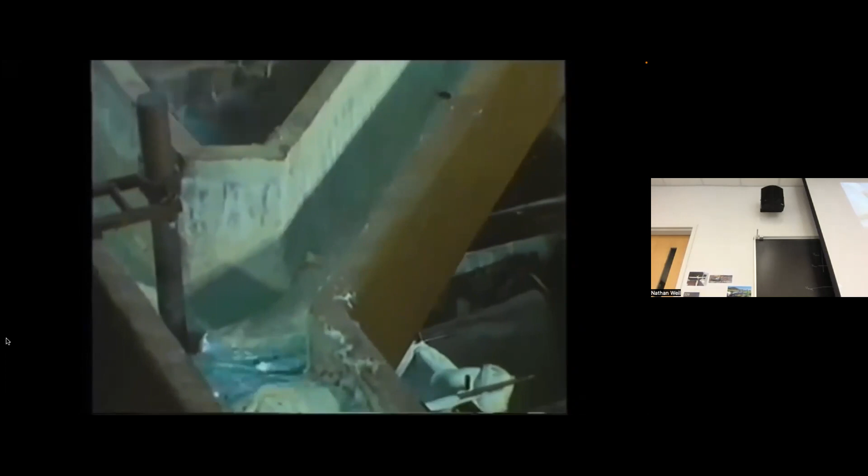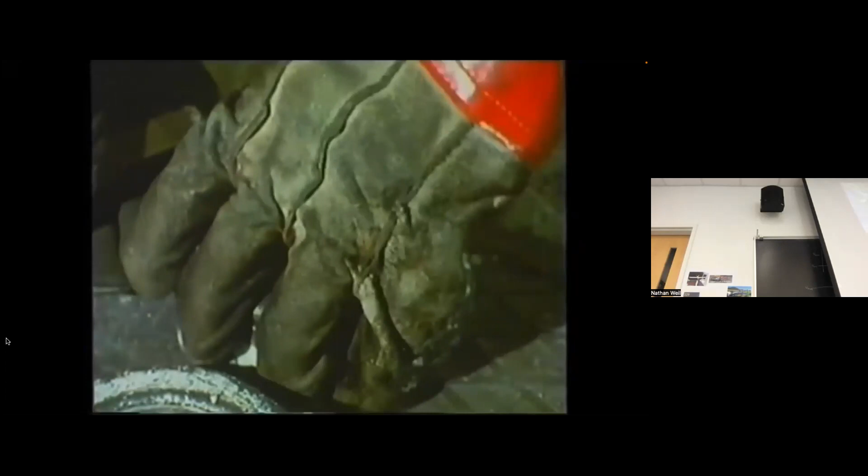Now we can see what happens as the aluminium solidifies in a special film. At a number of points in the liquid metal, tiny crystals begin to form and grow. Each crystal grows outwards in all directions until it meets the surfaces of its neighboring crystals. In engineering terms, each fully grown crystal is called a grain. In this piece of solid aluminium, there's a very large number of grains.

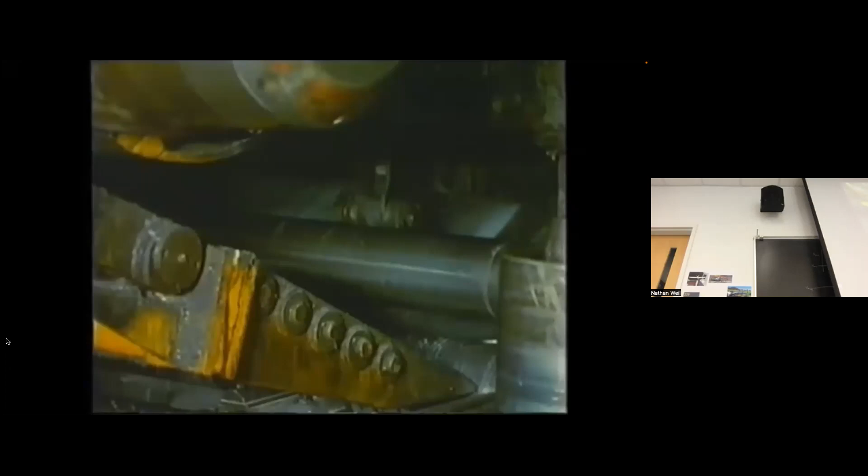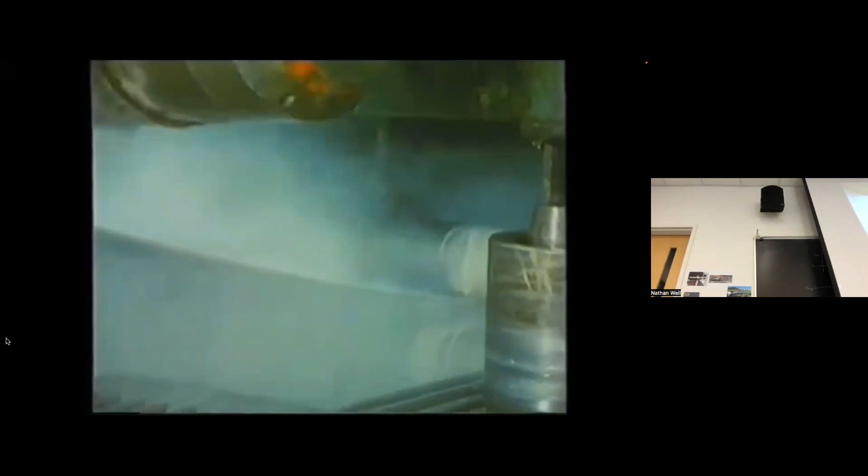Now, once the aluminium's been cast into slabs, it's rolled into sheets. To get the metal down to this thickness, it's been rolled many times. It's now relatively cold, so as the metal is squashed between the rollers, it's being cold worked. Let's find out what effect the cold working has on the grain structure of the aluminium. Here we're etching a piece of the aluminium before cold working.

At this stage, the grains are all approximately the same size and the same shape. Remember, they appear different shades only because of the way they reflect the light.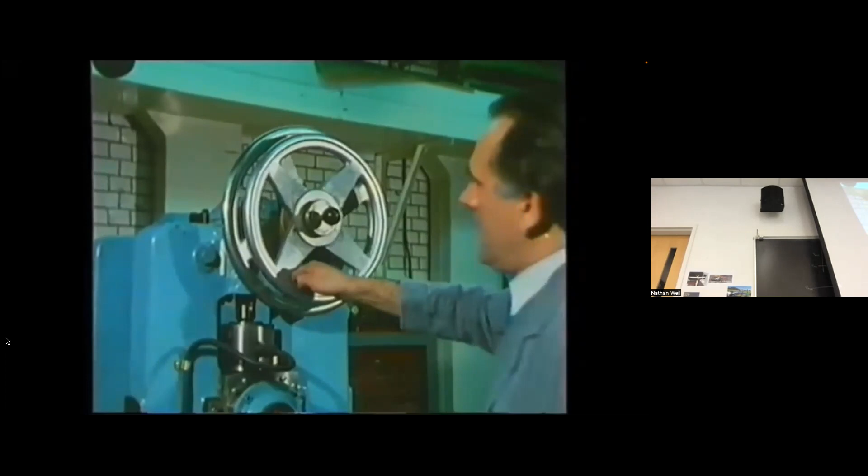Right, let's see what that's done to the grain structure. The cold rolled piece of metal is the one at the top. Can you see the difference? We seem to have changed the shape of the grains. They've become elongated.

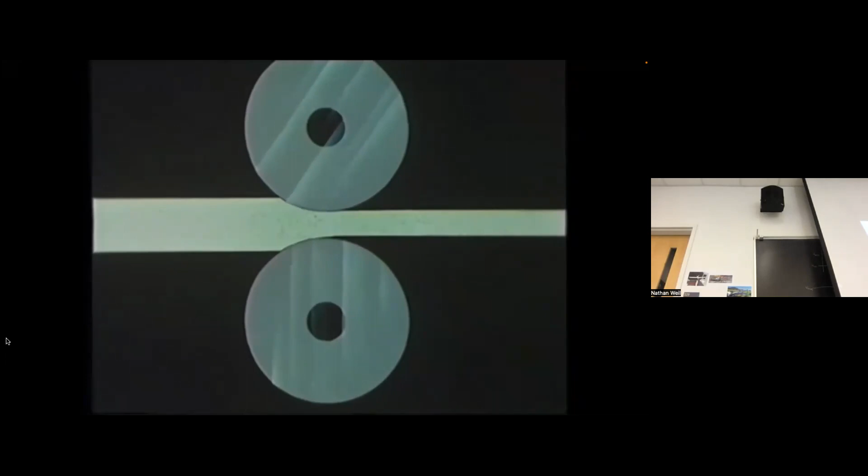We can get a better idea of what's happened in a diagram. First, we'll look at the grain structure of the metal before it's deformed. Here, the grains are normal. But as the metal is squashed between the rollers, you can see how the grains become elongated and distorted in the direction of rolling.

The change in grain structure that results from cold working is accompanied by a change in the mechanical properties of the metal. Its hardness and tensile strength increases while the ductility decreases.

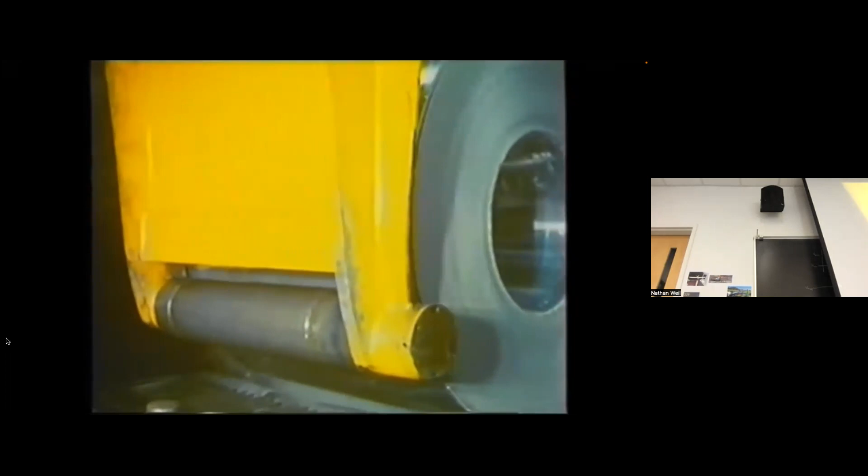After cold working a metal, it's usually heated to a sufficiently high temperature. Let's see what effect heating has on the distorted grain structure.

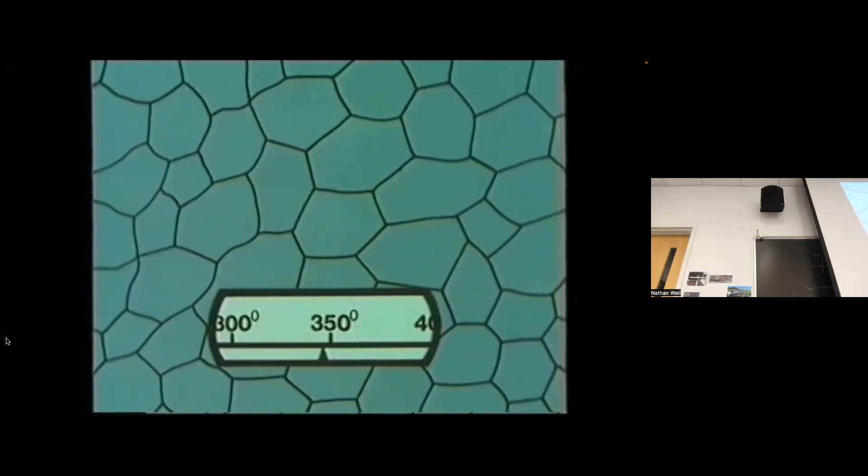In the case of this particular metal, nothing happens until the temperature reaches about 350 degrees centigrade. Now, at the grain boundaries, new grains begin to form. These grow rapidly until a new, undistorted grain structure completely replaces the old, distorted one. We call this process recrystallization.

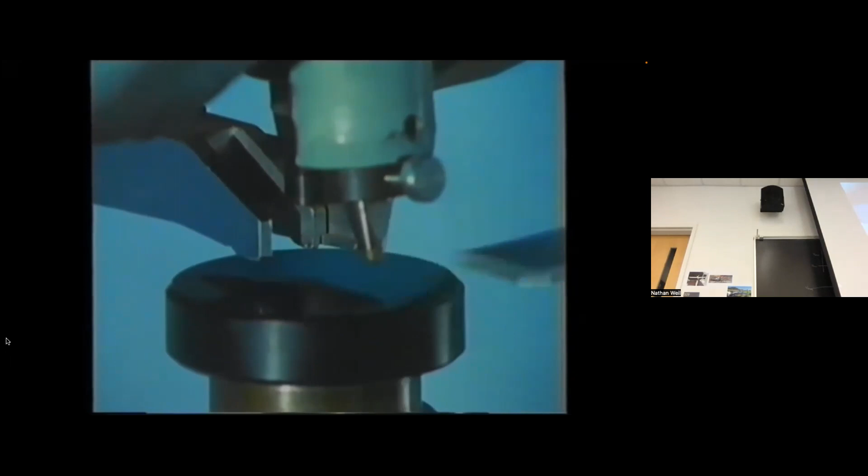Now, let's see what effect this has had on the mechanical properties of the aluminium. Hardness, for example. Here we're measuring the resistance to indentation of a piece of cold-worked aluminium. How does this compare with the size of the dent produced in a piece of recrystallized aluminium? It's much deeper, so recrystallization has restored softness.

And what about the tensile strength? First, the cold-worked aluminium is drawn. That needs a force of about 7 units to pull it apart. Now for a recrystallized piece. The force is going to be much less this time. The tensile strength has decreased.

If we put the broken bits back together again, we find the recrystallized piece stretched the most. So we've also restored the ductility. This is why heat treating is such an important thing in metallurgy.

However, the resulting properties depend on the temperature at which recrystallization is carried out. If the temperature becomes too high, some of the grains will grow at the expense of their neighbors. This can give rise to properties which are highly undesirable for most engineering applications.

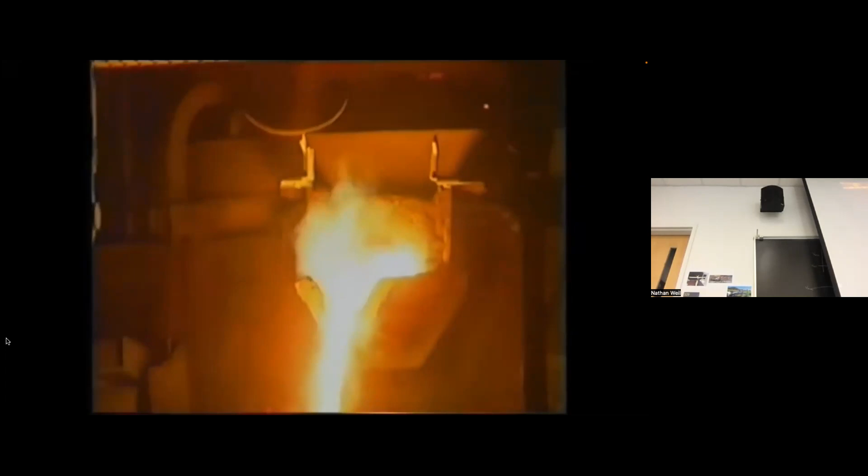This is molten steel. When it cools, it will solidify and grains will be formed. Let's find out what the grain structure of a piece of plain carbon steel is like. We've given this piece of steel a mirror-like finish.

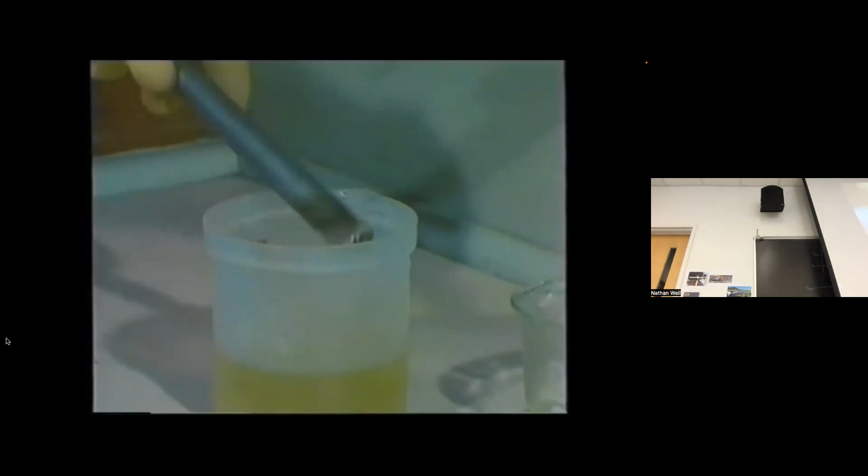Now we're etching it. The steel contains 0.4% carbon. So far, so good, but with the unaided eye, we can't see any grains.

We'll have to take a small sample of the steel and view its surface through a microscope. Here it is, magnified nearly 250 times. Let's take a closer look at this in a diagram.

In the case of steel, there are two different types of grains. We'll look at each in turn. The light grains, like this one, are made up of iron. Engineers call them ferrite. These give steel the property of ductility.

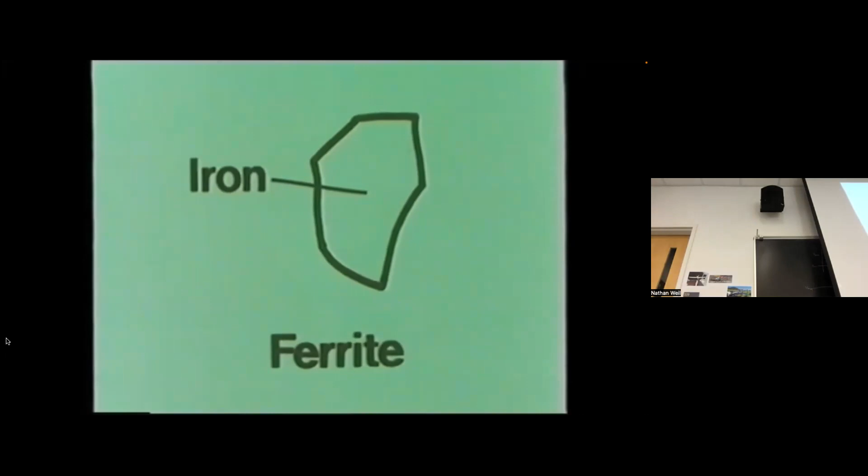The other grains, like this one, are made up in layers. The white layers are iron. The black layers are a chemical compound of iron and carbon, called iron carbide. Pearlite is the name given to this type of grain. They give steel the properties of hardness and strength.

This particular piece of steel is made up of roughly equal numbers of the two types of grains.

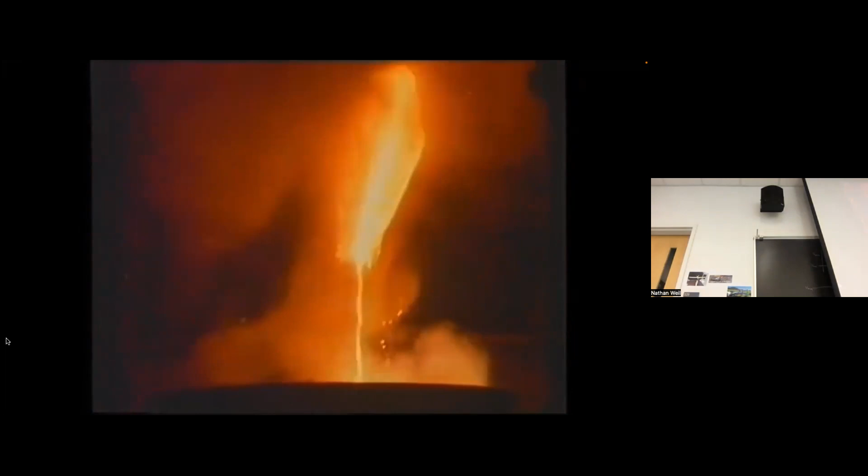So far, we've only looked at 0.4% carbon steel. However, steel can be produced with other carbon contents. What effect does this have on the grain structure? We'll start with 0.4% carbon and let's add some more.

Can you see what's happening? The number of pearlite grains is increasing. Now there are no ferrite grains at all. The steel now contains 0.8% carbon.

You can probably guess what will happen if we now reduce the amount of carbon in the steel. The number of pearlite grains decreases, leaving a lot of ferrite grains.

Now there's only about 0.1% carbon left. This is what a similar piece of carbon steel looks like under the microscope.

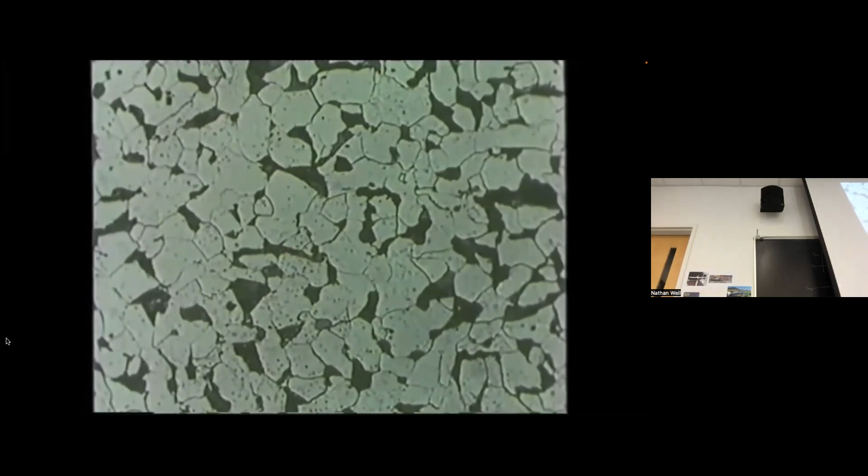Now we can change the mechanical properties of plain carbon steel by a carefully controlled sequence of heating and cooling, by heat treatment. Let's find out what effect heat treatment has on the grain structure of the steel. The rings we're treating contain...